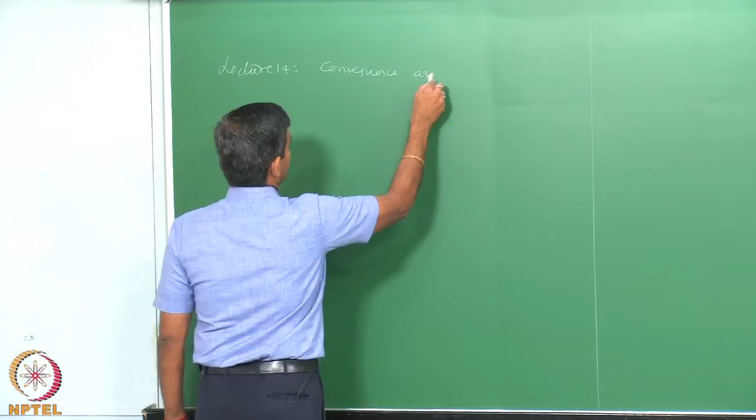Friends, welcome to the 14th lecture in module 3, where we are going to talk about consequence analysis. This is a lecture in module 3, and we know that in module 3 we are focusing on risk assessment and reliability applications.

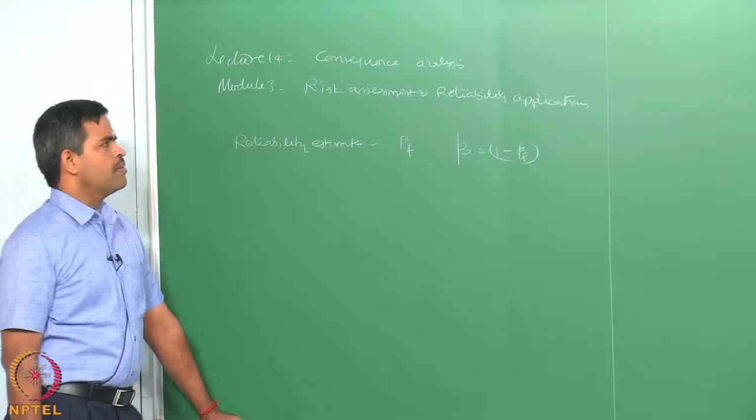Friends, we agree that in case of reliability estimates, it is important to know the probability of failure, and therefore the reliability index can be seen as the safety of the system. While estimating reliability, one is also indirectly interested if the exceedance limit, may be of material strength or load capacity, is reached - what would be the sequence of failure, what would be the mode or modes of failure, what would be the causes for such modes of failure, and ultimately what would be the effect or effects of those failures on the overall system.

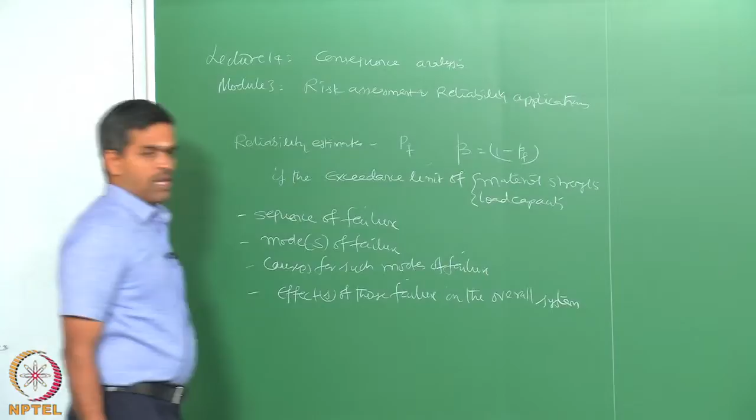If you look at these effects or consequences in terms of economic perspective and quantify risk in terms of economic perspective, maybe that will complete the problem in total.

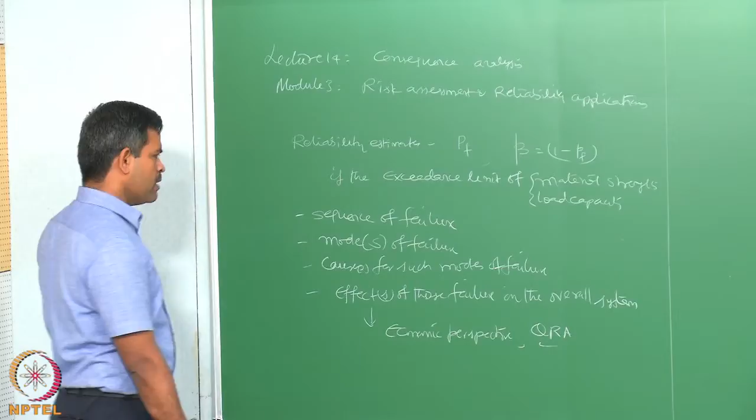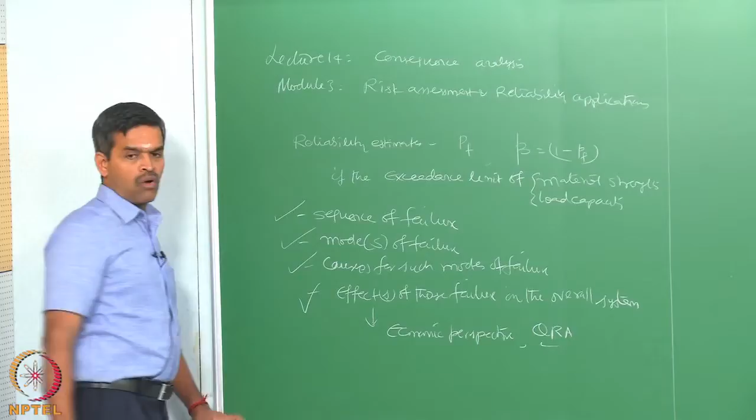For example, if you look at the risk priority number, which is an interesting quantitative outcome of an FMECA study, it also tells me the effects of those failure modes on the overall system. We have been discussing this in different kinds of risk analysis methods. Adding to this, let us today talk about consequence analysis, which is an explicit application of risk assessment, very commonly used in any industry in general and in particular in offshore industries.

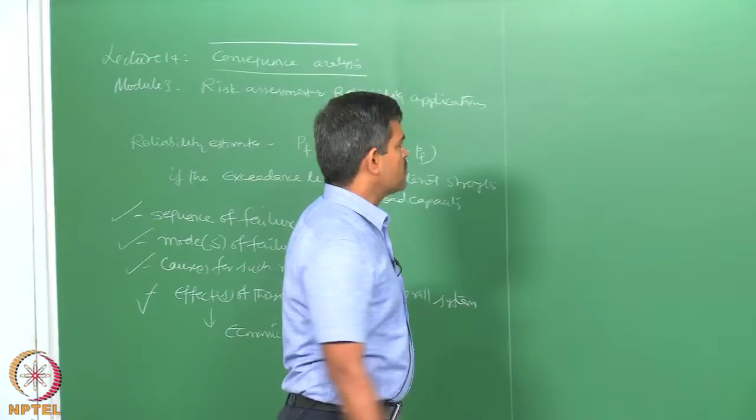In a consequence analysis, what do we exactly do? It is more or less a qualitative analysis where a number of various models are used to estimate the physical effects of an accident. The accident can be an oil spill, can be release of a hazardous material, etc.

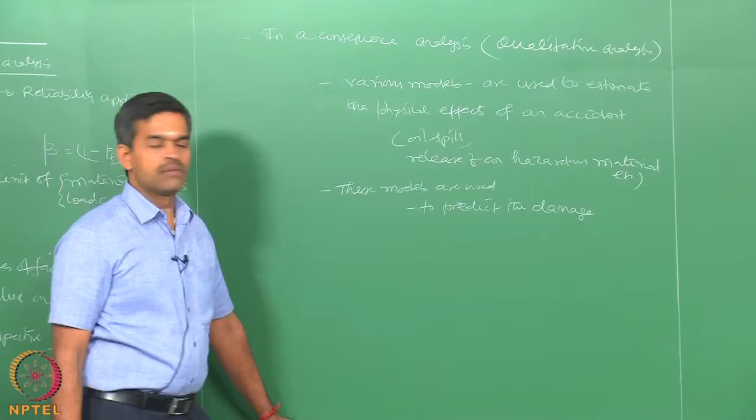Now, these models are used to predict the damage caused or arising from the failure modes. The damage could be of different orders - it can be lethality, it can be injury, it can be material loss, varieties of effects can occur.

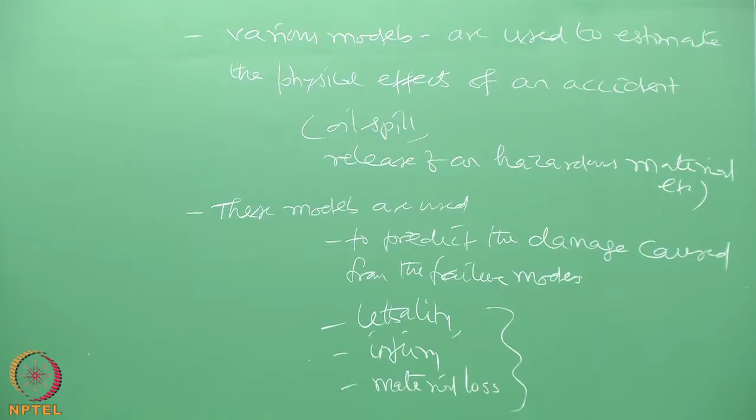So consequence analysis deliberately attempts to find out the effect or the consequences of the damage caused by different failure modes, in particular to different perspectives where risk assessment is also a part of it.

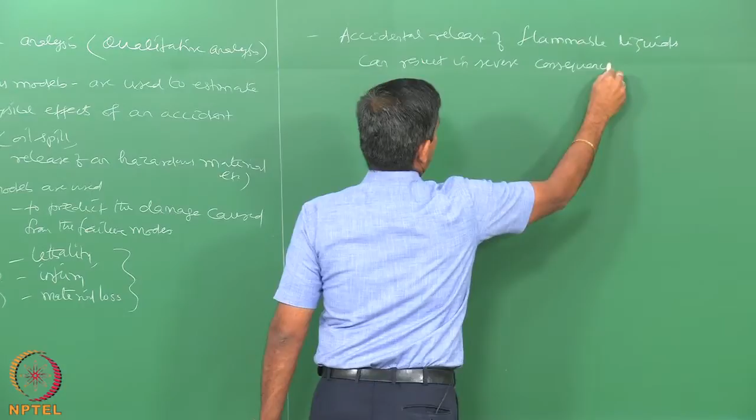Accidental release of flammable liquids, for example, can result in severe consequences. This is just one example - it is not necessary that hazardous release of gases do not cause severe consequences too, but specifically in offshore structures, let us say oil and gas production platforms, which are meant for exploration and production, even minor accidents can cause very serious consequences.

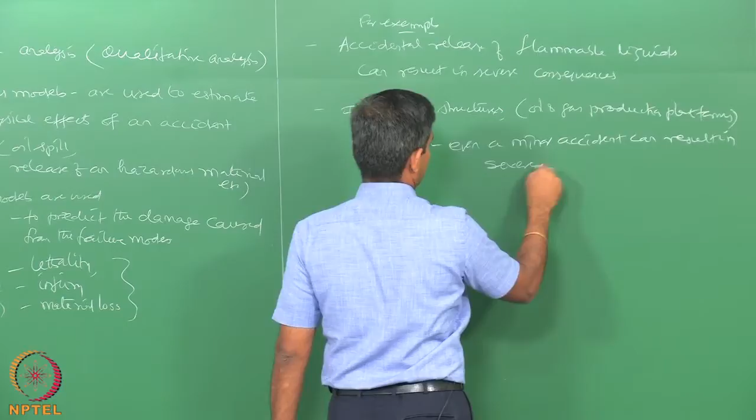That is unfortunate - even a minor accident can result in severe consequences. Let us see why consequence analysis is very important, primarily in offshore platforms or offshore structures, because this may actually cause or result in shutdown of operations. It may affect smooth functioning of the plant.

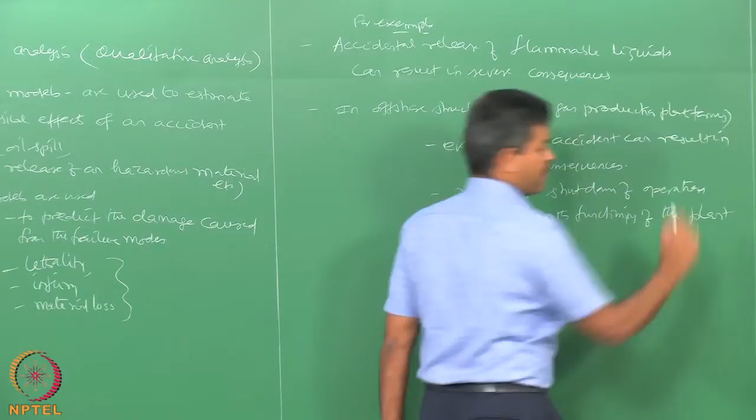So one has got to very clearly understand that the consequences alone need to be seen in a closer window. Consequences of various physical effects are to be seen in a closer window. The reason is they can even result in shutdown of the entire operation of the platform. Let us look at one such example.

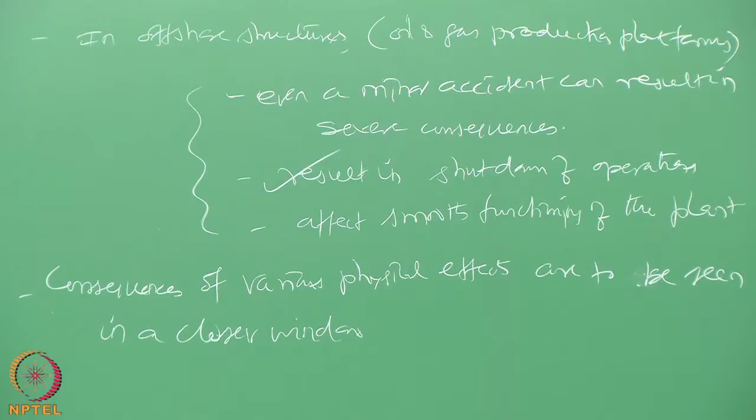Let us say there is a pressurized chemical which is being released accidentally. The moment it is released, depending upon the flash point temperature and the conditions prevailing in the platform - because the adverse effect is that oxygen is present in plenty, that is one issue, and wind is blowing, which can set fire easily - if the flash point temperature is reached for the specific chemical, it will result in ignition. This will result in what we call immediate ignition, which will cause what we call a jet flame as a result.

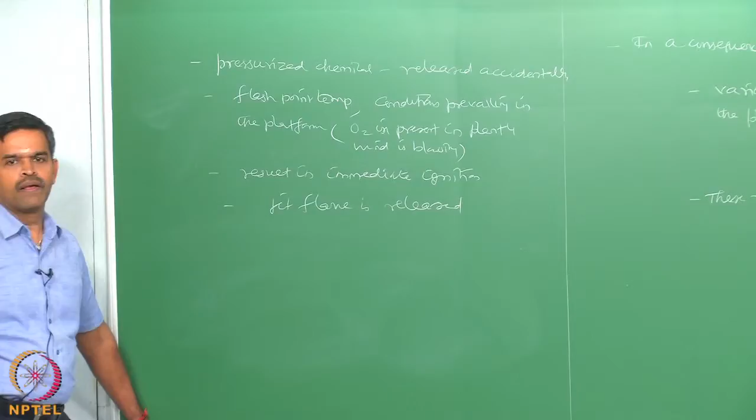Suppose by any chance you are able to delay this ignition - if the ignition is delayed by any chance - then the flammable vapors can also result in what we call a blast wave.

Which causes also overpressure. So this will have a larger area of spread.

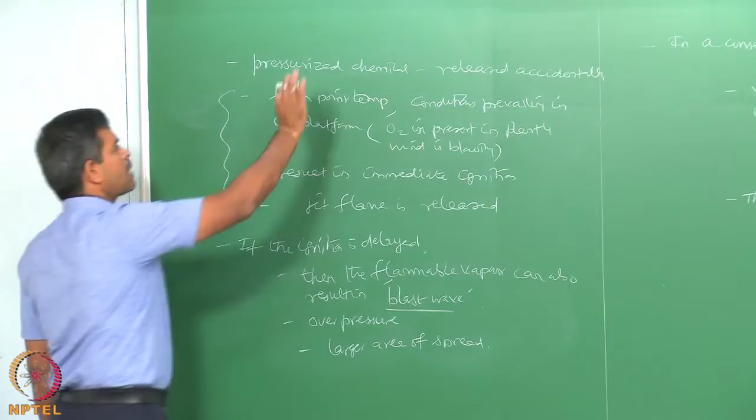The moment you have a hazardous chemical present in the plant, which is inevitably present in offshore oil and gas production platforms, if that chemical or gas is released even accidentally, either it catches fire if the flash point temperature is reached, and that will cause serious consequences. If the ignition is delayed by some process or conditions present in the platform, it will cause a blast wave and overpressure, which will also create serious consequences by spreading over a large area around the platform.

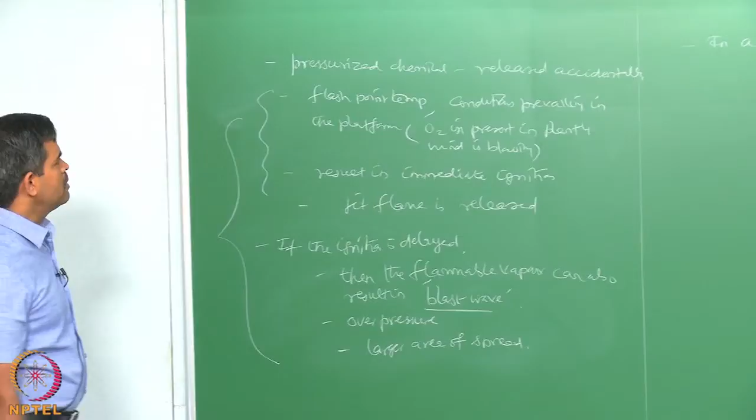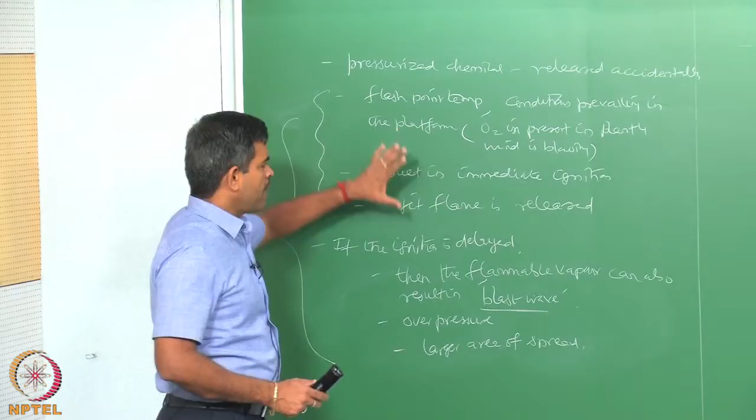In both ways, you can easily understand that understanding the consequences of failure modes or accidents is more interesting and more demanding than analyzing risk based on probability of occurrence and consequences. Therefore, consequence analysis plays a very vital role in offshore industry risk assessment, because this is a very important segment where people have to pay close attention in a micro window to really understand the consequential effects caused by the failure of different modes on the overall functioning of the platform.

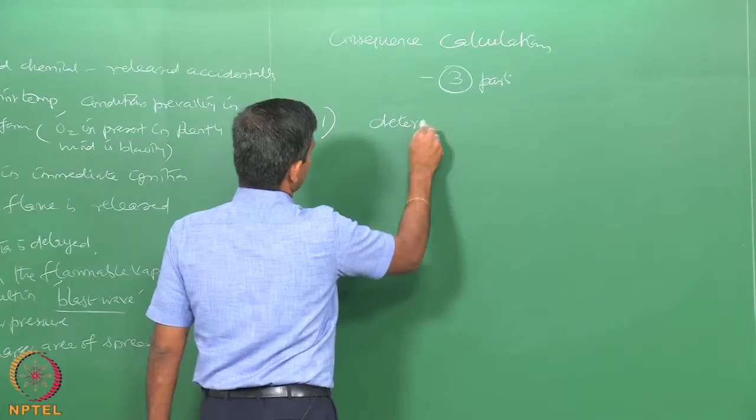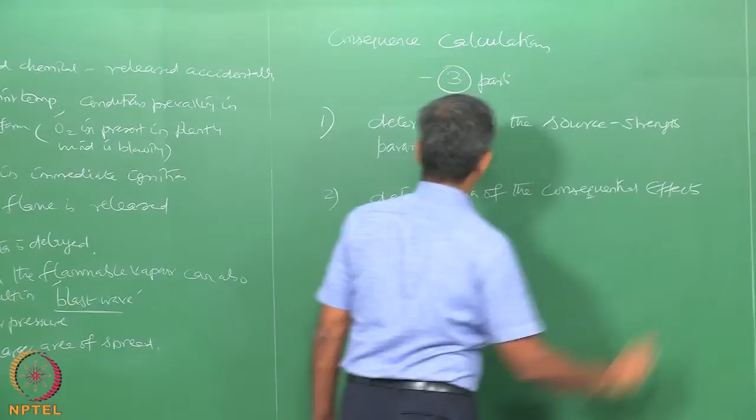Now the consequence calculations can be divided into three parts. Part 1 will talk about determination of the source strength parameters, part 2 talks about determination of the consequential effects, and part 3 talks about determination of the damage or damage distances, or what we call as hazard distances.

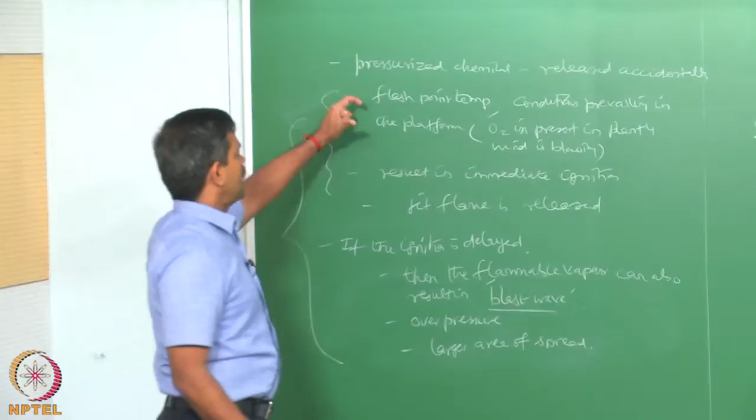So kindly pay attention to these areas as explained in a specific example of a chemical release. We are bothered about two intensities of parameters here. One is what would be the devastating consequence caused when it catches fire or results in overpressure, that is one. The second could be how far and how long it would be spread.

So there are three stages. One is to determine the source strength, whether the released chemical will catch fire or develops overpressure or a blast wave. So that depends upon the source strength parameter, and of course the conditions prevailing in the platform, which will also add to the strength or weakness of the source strength parameters.

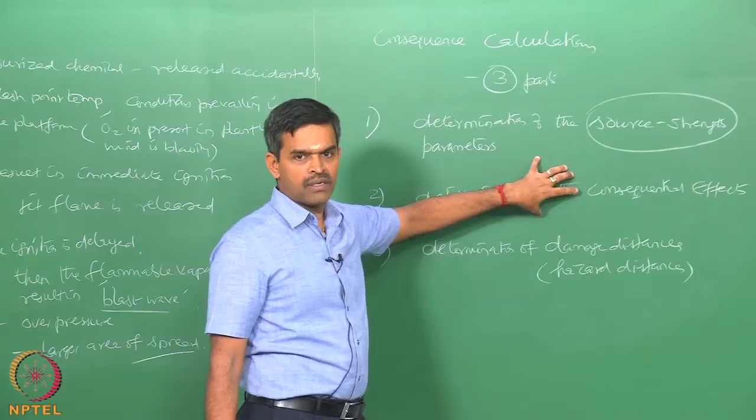The moment I know this, obviously the second part of the calculation, I must be able to estimate the consequential effects caused by this. Will it cause a fire? If it causes a fire, what would be the damage? If it causes a blast wave or an overpressure, what would be the damage?

There are models available to estimate the physical damage caused by such effects on any system, maybe structural system, maybe machineries, equipments, maybe human beings, etc. Of course, the third and vital part of the calculation should also indicate what would be the hazard distance. It means how far and how circumferentially this damage would spread.

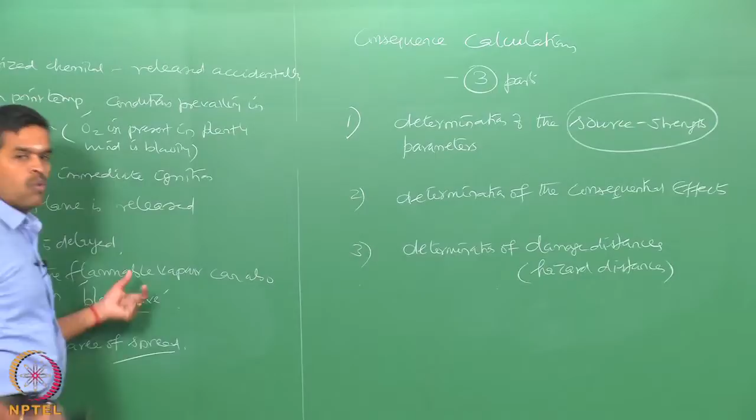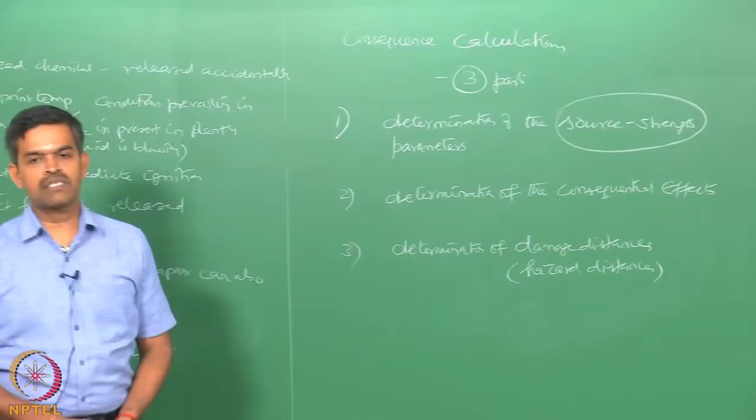So therefore friends, risk assessment alone, which gives me consequence as a multiplier, will not be able to throw a broader window in terms of consequence analysis separately. Therefore, in offshore industry, risk assessment is also being estimated by a separate QRA, which is talking purely about consequences alone, because they have lots of parameters to be indicated and lots of serious effects to be diagnosed as part of the consequence analysis caused by release of any chemical or gas, which may be purely accidental, non-intentional. So let us talk about each parameter separately and elaborate them.

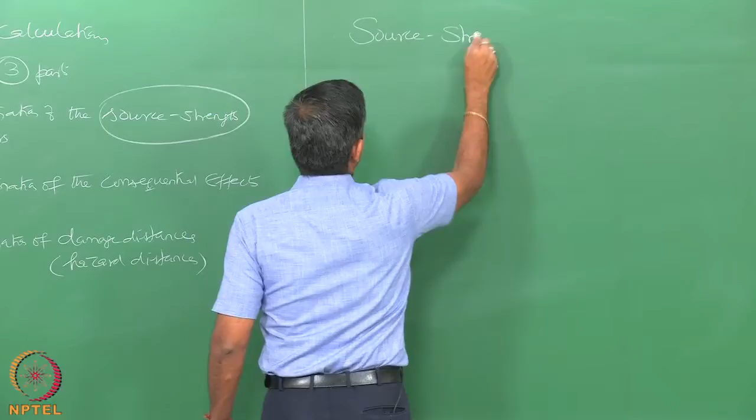What is source strength parameter? The source strength parameter depends on the condition at which an accident or explosion takes place.

It depends on the chemical composition of the release. It depends also on the temperature and pressure at which the chemical or gas is being released, what we call as operational temperature and pressure.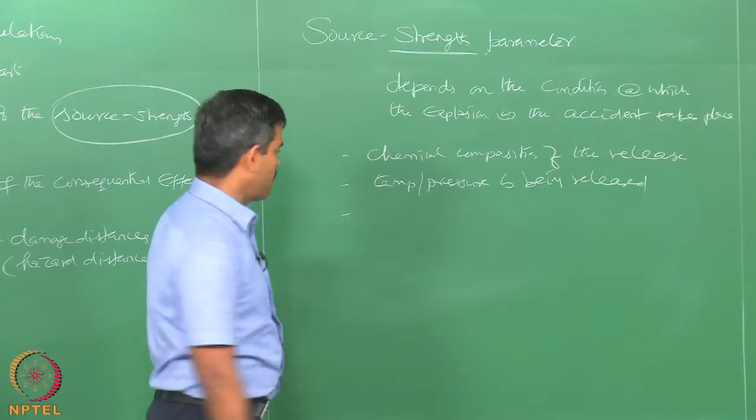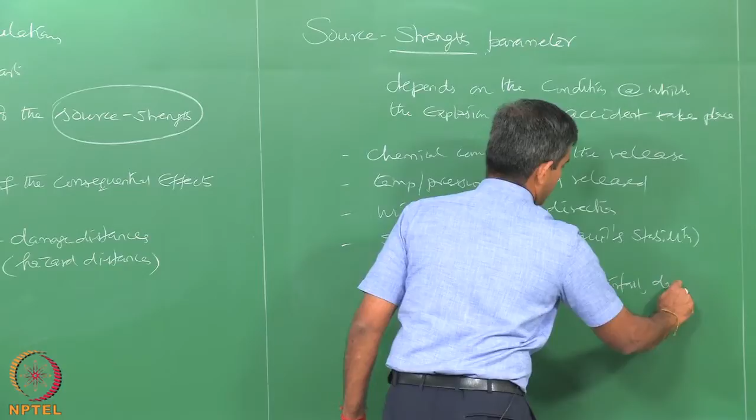It also of course depends on wind velocity and wind direction. It also depends on stability class, usually given by Pasquill stability. Pasquill stability will give highlighted figures about the relative humidity in that area, the rainfall, the day and night temperature, etc. So it covers all and tries to give me a stability class based on which the strength parameter of the source can be estimated.

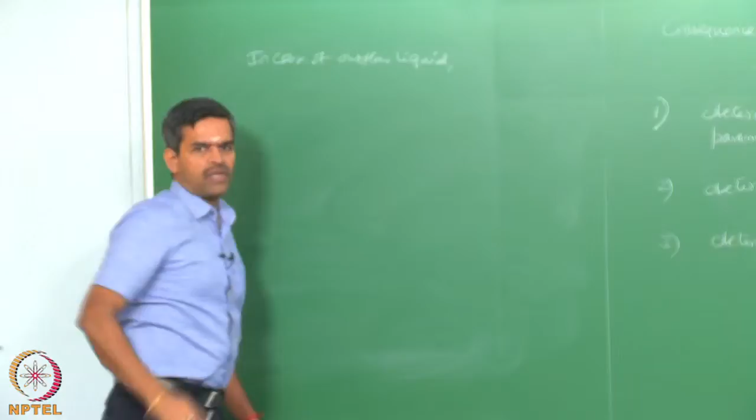Let us say, for example, in case of an outflow liquid, outflow of liquid, it may be in a vaporized form from a vessel - liquid or vapor from a vessel or a tank or a pipe, as the case may be. The volume and rate of outflow is also an important parameter.

Which is added to the source strength parameter.

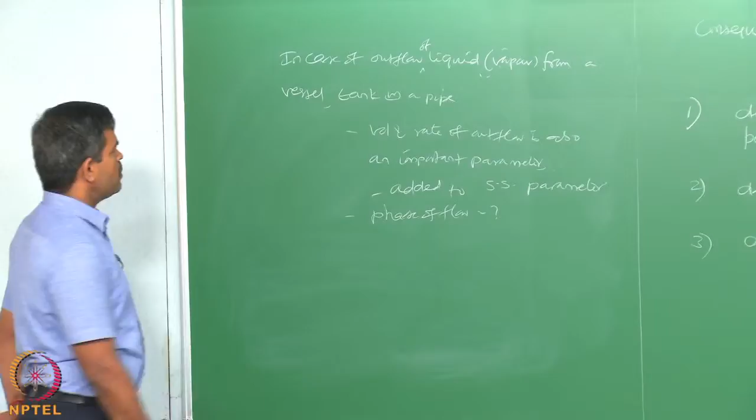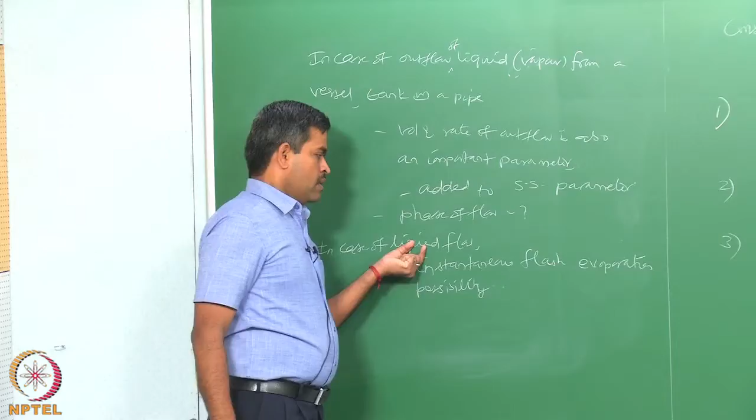Also, the phase of flow is important - in what phase it flows. In case of only liquid flow, one is interested to know the possibility of instantaneous flash evaporation. One should know, depending upon chemical engineering handbook data available for every kind of liquid or chemical being released, the flash point temperature at which flash or evaporation is possible. So if your operating temperature matches with that, one can estimate the volume of flash that can happen as evaporation when the liquid is released as an outflow.

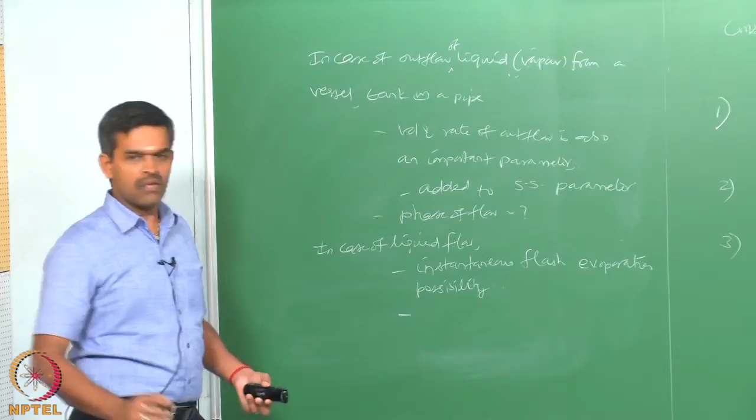Of course, we all agree that all the liquid getting outflow is not going to be evaporated - some will remain in liquid state. Therefore, one should also be interested to know the possible dimensions of the collecting pool of the liquid. In fact, we call this the Bund dimensions or Bund volume. So let us see what the Bund is, quickly.

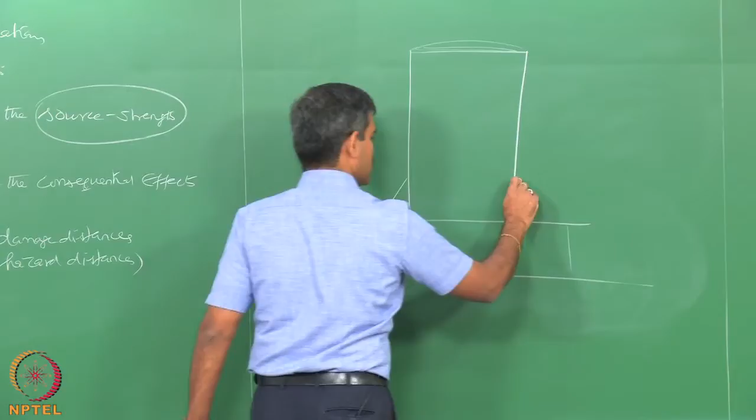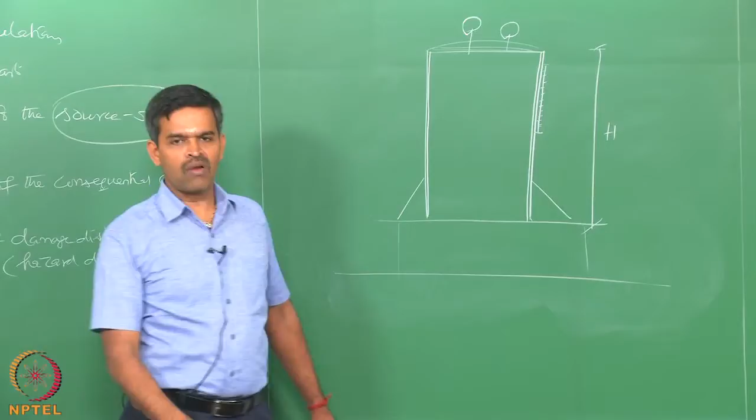Let us say I have a tank where the hazardous chemical is being stored. The tank will have a base, resting and founded properly, with gusset plates, and the wall thickness is shown here. Generally, the tank will have a calibrator indicated on the side to show the liquid level - it may be an electronic float. There will also be pressure release valves and safety valves, which indicate safety arrangements in the tank. The height of the tank above the ground, where crude oil or any chemical is stored in process industries like oil and gas, is usually about 12 to 15 meters, and the diameter is about 6 to 8 meters - tall tanks, very large in diameter.

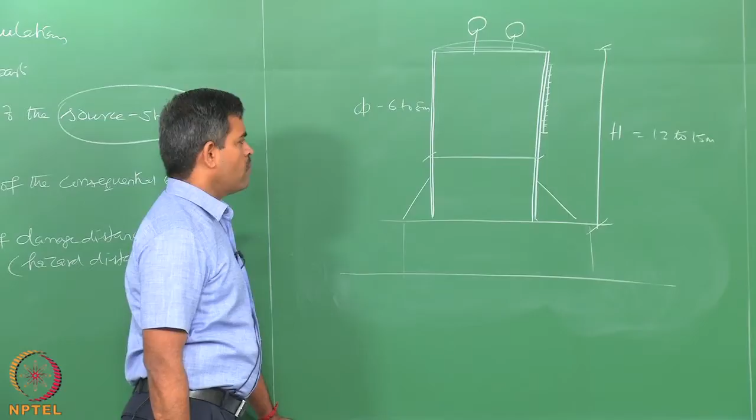Obviously, whenever there is a possible liquid outflow from this tank because of accident, fissure, crack, or overpressure, part of the liquid exiting will get evaporated depending upon the flash point temperature of the liquid stored inside, but the remaining will have to stay as a liquid. So the liquid has to spread all around the tank.

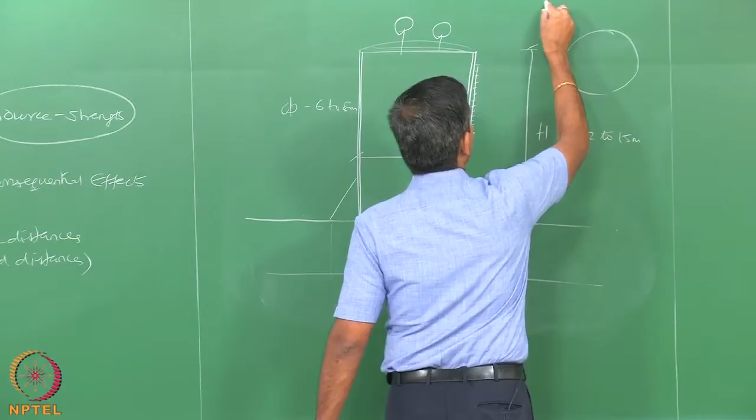If you look at the plan, if this is the tank, all around essentially there will be a protective system. If I cut a section here, let us say that is what I see of the tank here - so I will also have a wall. We call this the Bund.

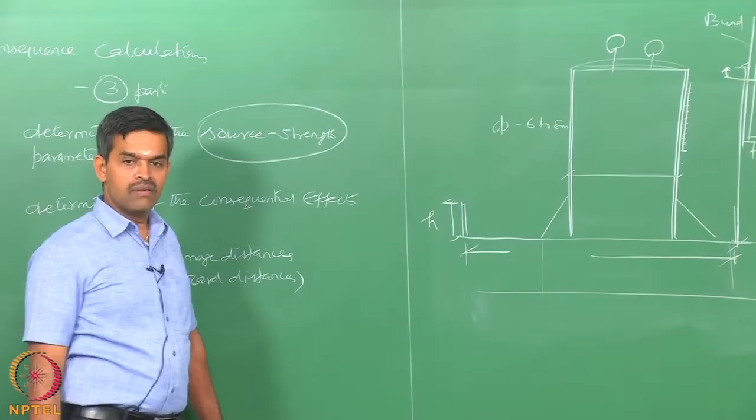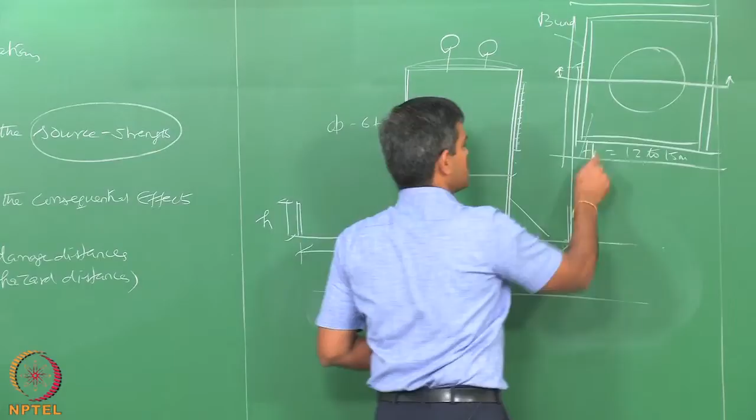So I have to estimate the pool volume. Based on that, I must fix the dimensions of the bund and its height. This is possible only when you do a detailed consequence analysis to estimate how much quantity will be released as outflow liquid, how much will get evaporated, and how much will remain as liquid for some time - because that liquid should not be allowed to flow further, it should be contained around the tank. One may ask why it should be contained around the tank - because around the tank we generally have firefighting devices like sprinklers and deluge systems. So in case it catches fire, these sprinklers can spray water and the fire can be contained in that specific segment, stopping the spread of fire.

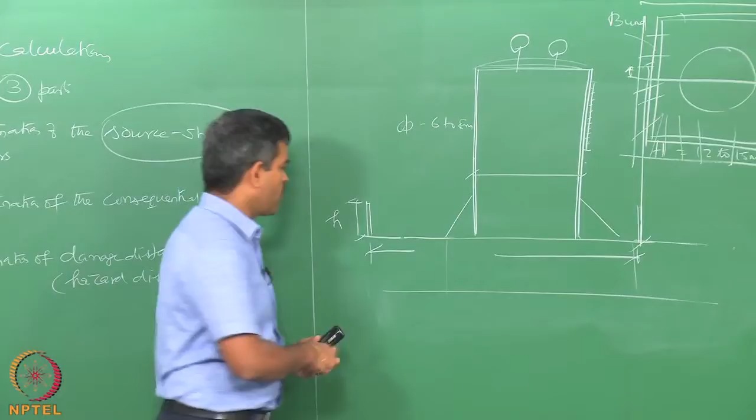So therefore, I need to construct a bund and know its volume. To know the volume of the bund, I must know the input data available - how much liquid will fall on the bund, because that depends on how much volume of liquid is in the tank, out of which some percentage can get evaporated because of the flash point, and the remaining forms the pool. The liquid staying here is what we call the pool. So we need to know this - these are all important data that form the source strength parameter in consequence analysis.

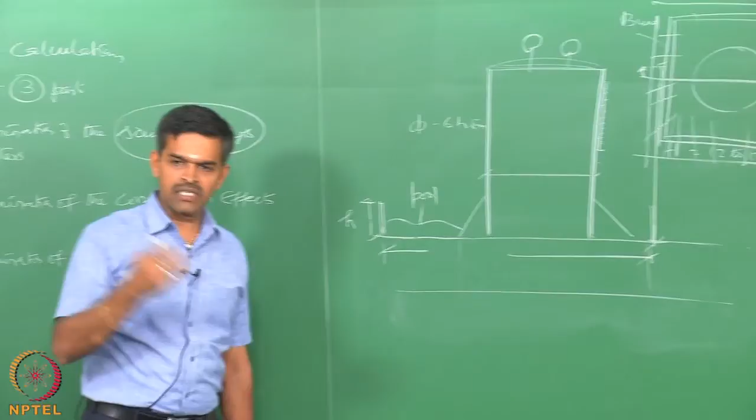In addition, one should also look at the evaporation rate as a function of the volatility of the material, based on which the pool dimensions can be fixed. Then the sprinkler design should be done in such a manner that wind velocity and wind direction are taken care of while designing the layout of the sprinkler system, so that the fire does not spread in the windward direction but is contained within the pool area.

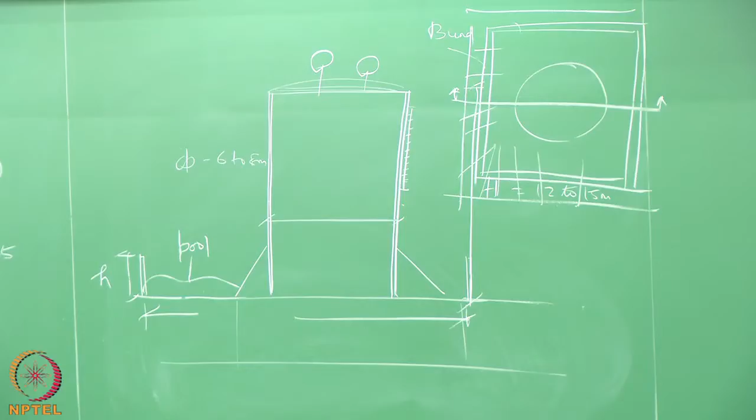So let us look at the second issue in consequence calculation, what is called consequential effects. Consequential effects depend on various parameters.

It depends upon the dispersion relation of the gas in atmosphere. Of course, we all know that dispersion relation is a function of the source strength parameter. It also depends on relative density of the gas, and of course on Pasquill stability class. And it also depends on topological data of the surrounding area.

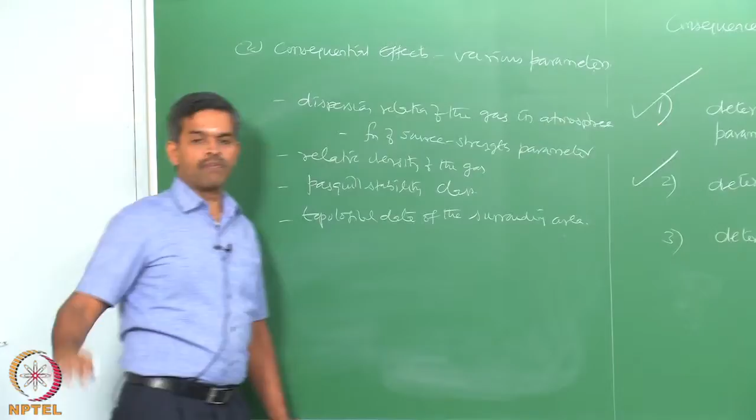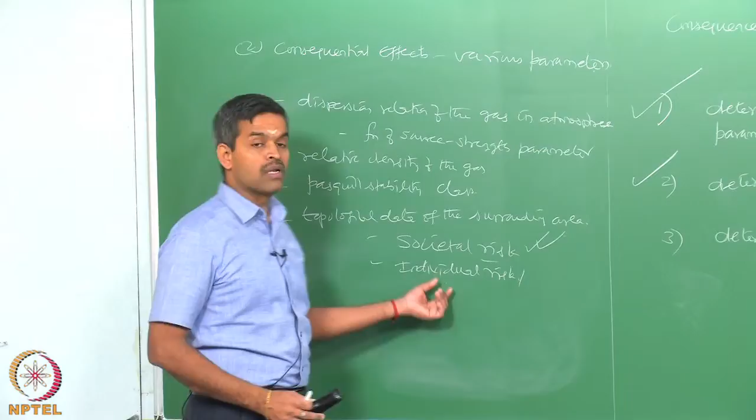Because I am talking about the consequential effects not only to the plant, but also to the public near the plant, I am also looking at the societal risk. Societal risk is that risk caused by the accident or the consequence of the accident on the plant. Individual risk is the effect caused by the failure on the plant itself or the personnel working in the plant. So societal risk is much more important, larger in dimension, compared to the individual risk of those working in the plant. Therefore, I must also know the topological data of the surrounding area, the population density, the age group of the population, how far the spread of the residential area is, and how far away they are located from the plant.

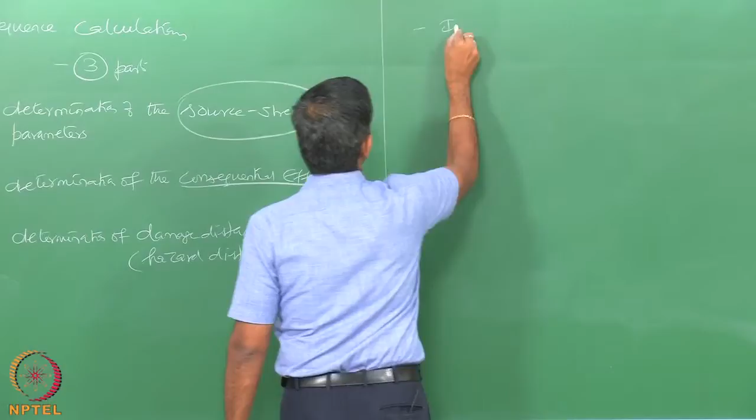Interestingly, intensity of heat radiation, which is usually expressed in kilowatt per square meter, due to fire, is actually a function of distance to the source where the accident has occurred.

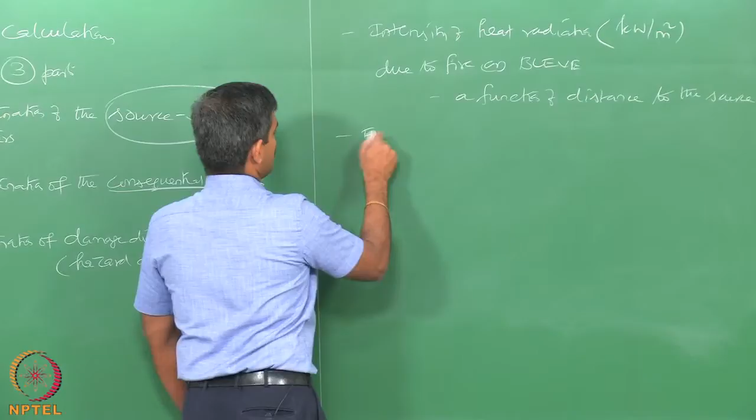It also depends on the energy of the vapor cloud, which is usually expressed again in Newton per square meter, which is now a function of the distance to the exploding cloud. So these values need to be computed in the second part of the consequence analysis.

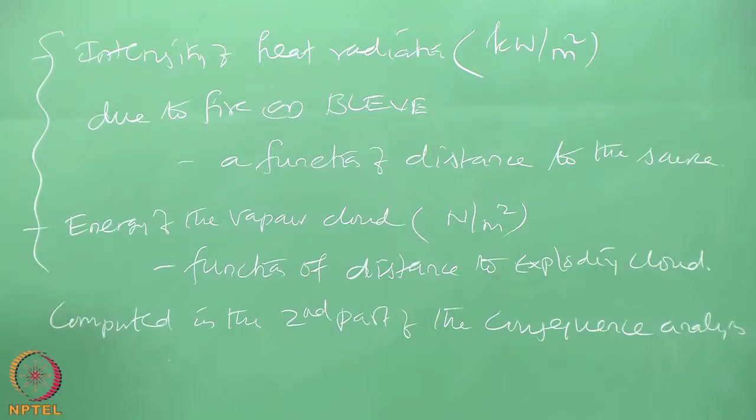Further, it is also important to know the concentration of the gaseous material in atmosphere due to the dispersion of evaporated chemical, which is also an important parameter in estimating the consequences, because this will tell me what would be the effect caused by this dispersed gas to the society or to the public around the plant.

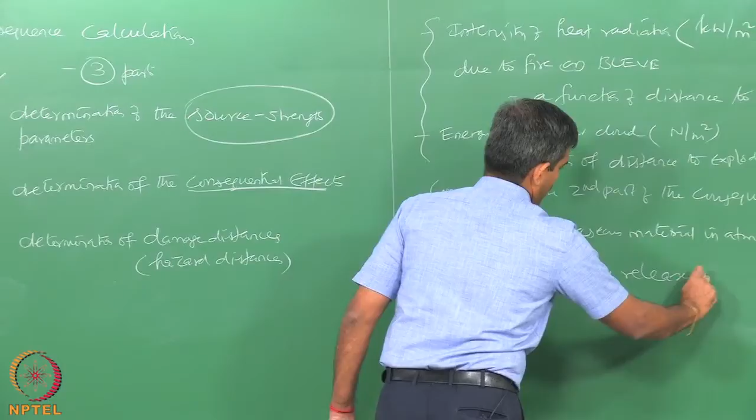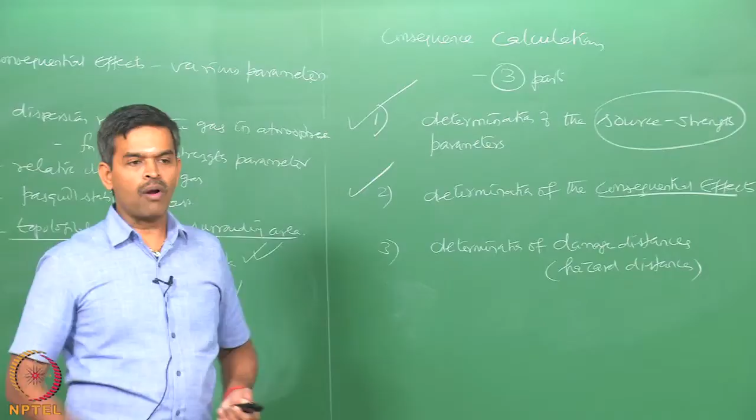These are all true whether the accident is going to be either explosive or simply a toxic release. So the consequential effects throw a brighter window in understanding many parameters which are otherwise not looked upon in detail when you do risk assessment alone, where consequence only becomes a multiplier in terms of estimating quantified values of risk, because we know risk is a product of the probability of occurrence of an event with the consequence of that event if it occurs.

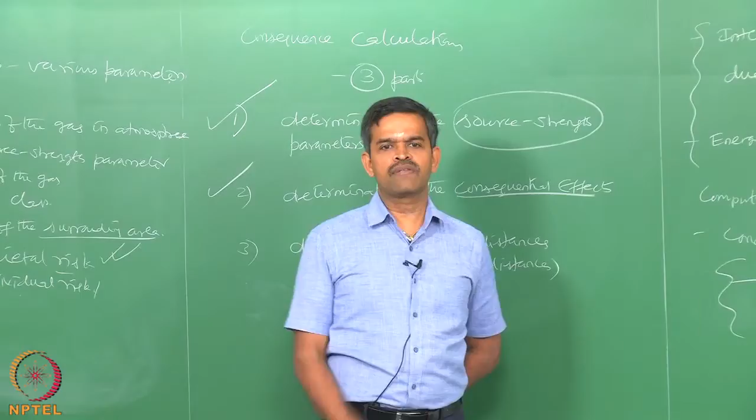So varieties of types of models are used in risk analysis, and they all depend on what type of material is being released and the way the material is being handled. Therefore, properties of materials and handling methods definitely govern the choice of risk analysis. What are those properties?

Risk assessment method through consequence analysis depends essentially on the choice of the material which is being released or handled, and the method by which it is handled. So various factors could be the phase of the material, whether it is gas, vapor, liquid, or sometimes even solid.

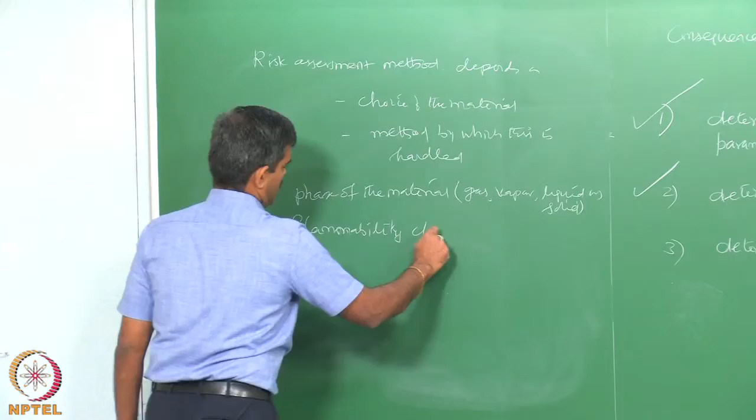Then the flammability characteristics of the material, whether it is an explosive or a simple toxic chemical. The third character should be the storage temperature and pressure, at what temperature it is being stored, then the release type, how it is released, whether by controlled outflow or catastrophic failure.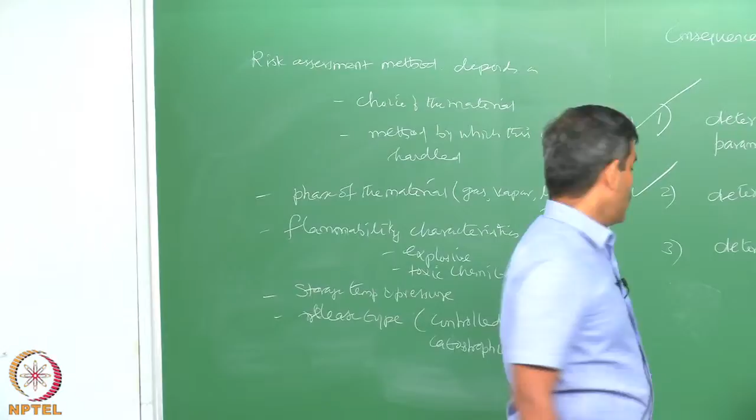If it is a controlled outflow, then one should also bother about the pump capacity, what is the capacity of the pump you are using to pump it out. The third could be the damage distance, how far the damage will spread.

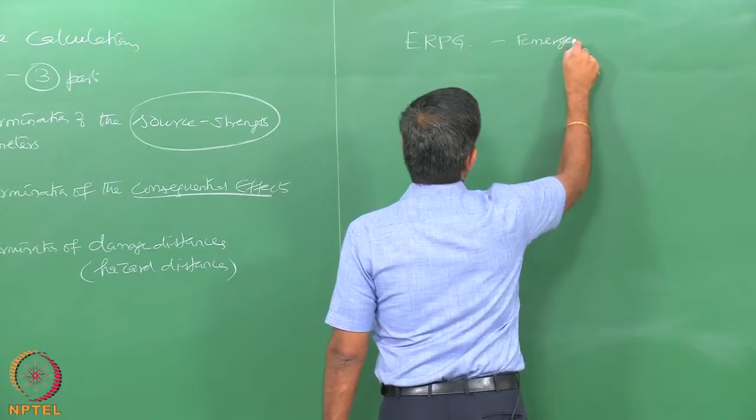For every chemical or gas being released, there are different guidelines given by the international regulatory bodies, called emergency response planning guidelines. For a concentration of the chemical in parts per million, what would be the ERPG value, which is available in the chemical engineering handbook.

Based upon the ERPG value, one can compute what is called hazard distance using the equations given by Dow chemical risk analysis.

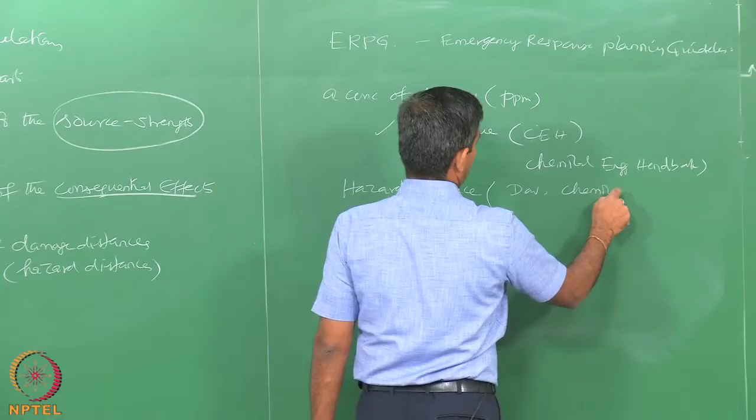The leak or rupture of the liquid can result in immediate ignition. If yes, it will result in a pool fire or jet fire. If no, then one should be able to confine it.

If you are able to confine it, then one can delay the ignition. If you delay the ignition, it can form either a safe dispersion or result in VCE, a vapor cloud explosion.

If confinement is not possible, when there is no immediate ignition, then you check if it is going to ignite further. If it ignites, it results in a flash fire or jet fire. If it does not ignite, then you can have a safe dispersion.

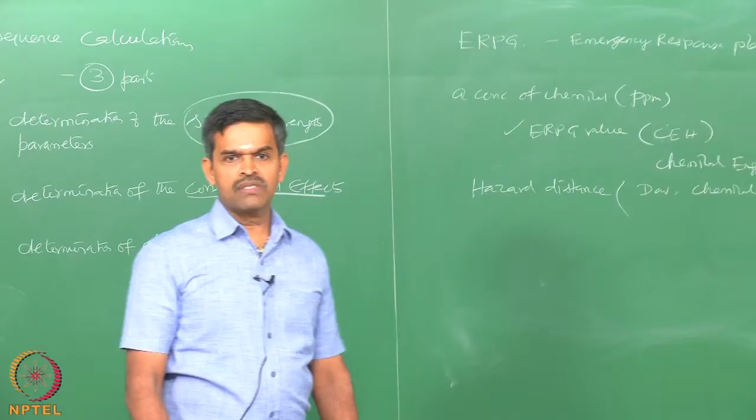But of course, these kinds of quantitative risk analysis, where we talk about consequential analysis, have a few limitations. What are the limitations of such QRA studies? There are a few limitations, as the approach changes and gives different results. The first one is scenario selection.

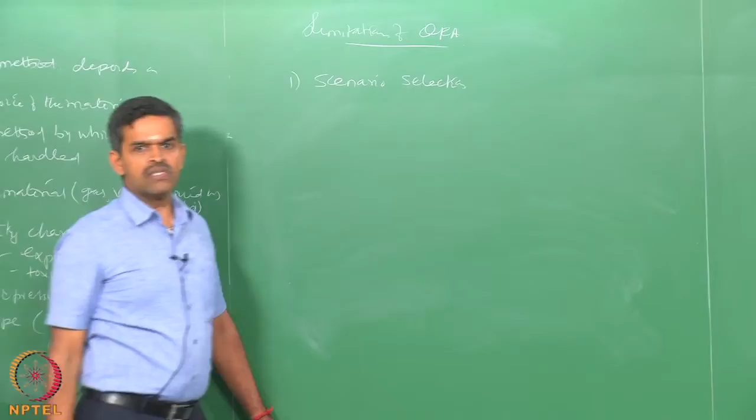The scenario selection depends on the expertise on a specific problem, because scenario selection can change the view of the QRA in total.

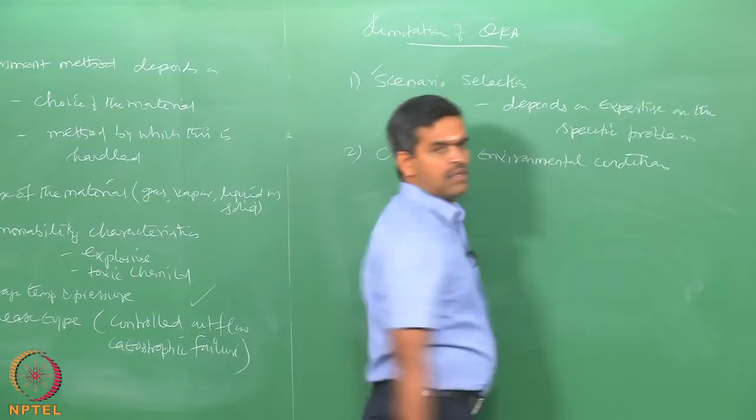The second factor, which is also a serious limitation, is changes in environmental conditions. These changes can cause a very serious deviation in interpretation of results.

Of QRA. For example, the operating temperature or ambient temperature during the release of liquid or gas can be an important factor that tells you the serious deviation in the results.

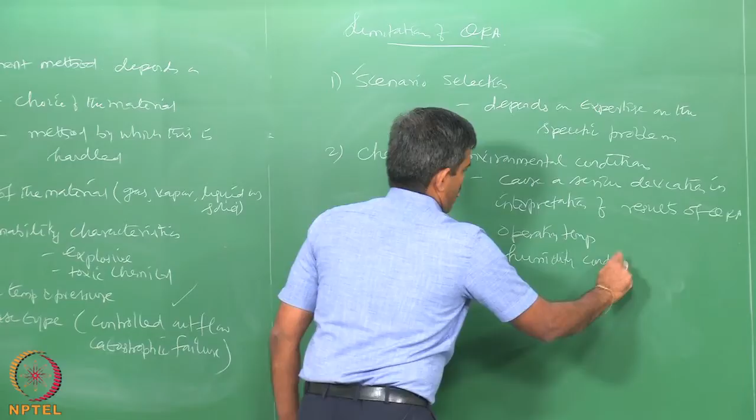The next could be operating temperature as one character. The other could be the humidity conditions present at the release, which has been assumed in the QRA study.

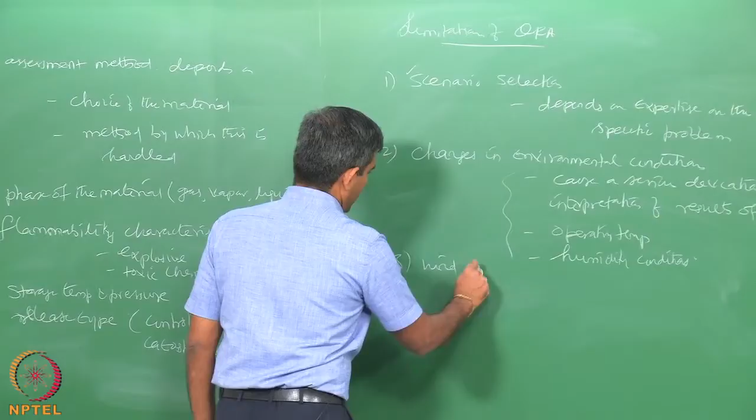So all these factors can result in different result interpretation from the QRA studies, and more importantly, the wind direction and velocity, because this can affect the results very seriously.

Therefore, whatever model we use for consequence analysis or QRA, each model will simulate different results for the same release scenario.

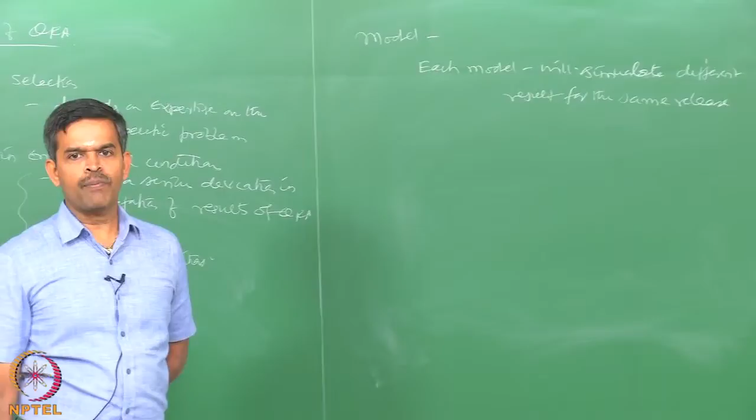Therefore, if the choice of the release model is not appropriate to the above parameters, different models will give different risk assessment statements, though there is some commonness between them. In addition, the main disagreement between these will be the risk acceptability criteria.

As I said, in offshore industry, the risk acceptance is pre-declared for every kind of industry, every kind of process unit of an offshore plant.

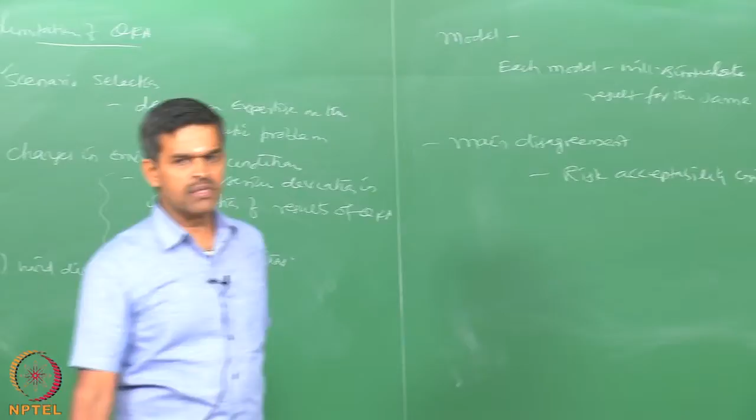So depending upon the risk acceptability criteria you are proposing, you have to estimate the risk based on this. There are many countries, unfortunately, that do not define an acceptable risk level for an offshore industry. And interestingly, the acceptability criteria is different for different countries also.

Therefore, the database used for probability estimates can be subjective, and they can be different as well. So these parameters will strongly influence the results obtained from the risk assessment studies that we just followed by different methods.

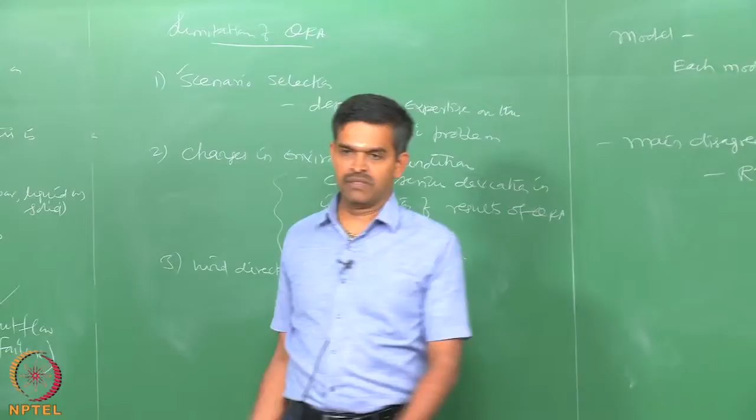So in this lecture, friends, we have tried to understand the consequence analysis, which is part of risk assessment, giving you a thorough window of understanding towards the consequential effects caused by various failure modes on a given system. It also works out the three stages, the three parts.

The most important part is the societal risk estimates which come out from the consequence analysis, a very important part of this kind of QRA. However, this kind of QRA studies have limitations, and different methods will give you different results depending on what model you have been choosing for estimating the QRAs.

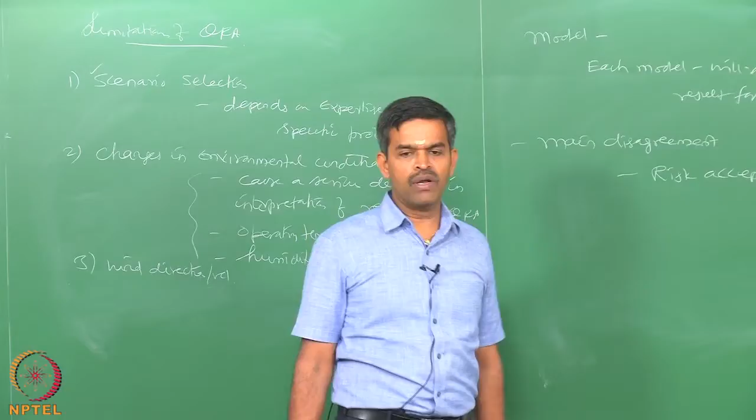Therefore, one needs to very carefully select the choice and release of methods and material, and accordingly use an appropriate model to get a better and acceptable risk assessment, because this also depends upon the criteria for acceptability of risk in a given plant. Thank you very much.